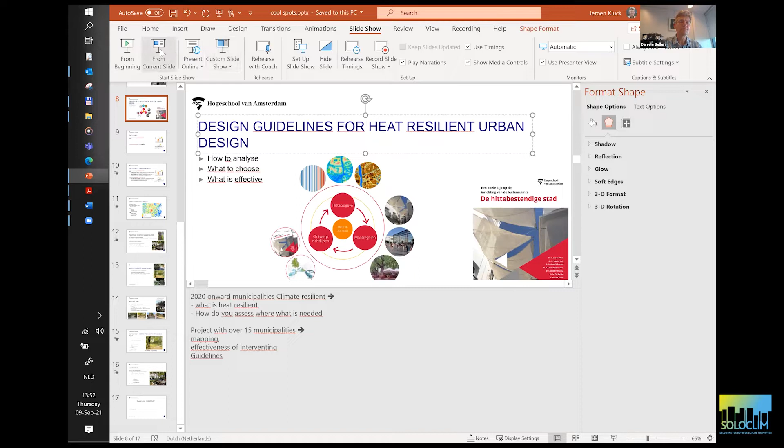Okay, thank you very much. I'd like to share my screen, but because I just came in, I'm still looking where I can find my presentation. It is on my screen, so I think maybe you see yourself now, but if I switch to the right thing, it should come. In the meantime, I can start talking. One moment, slideshow, start, from the beginning. Do you see my slideshow now as well? Yes. Okay, thank you very much.

So my name is Jeroen. I'm working at Amsterdam University of Applied Sciences. In fact, I'm a civil engineer and a water manager. Many years ago I was mainly interested in sewer systems, but then it became more interesting because extreme rainfall events did flood cities, so I started working on this as well. It was in 2006, and it struck me that many municipalities mainly designed only for the design storm, an amount of rainfall expected once in 2 years. We didn't look at all at what's happening once in 50 or 100 years. So that was the reason why I started working on this.

Many municipalities had to find out what they wanted to do about this. I was able to create a research group at the Amsterdam University of Applied Sciences, and now I have 15 people working for me, a whole variety, from meteorology to urban design and of course hydrology. The title I got is about water-based solutions to create climate-resilient cities. They also become healthier, resilient, dynamic, but certainly they should become more attractive, so I like to add attractive. I want to show you 3 projects I've been doing the last years, ranging from small scale to larger scale.

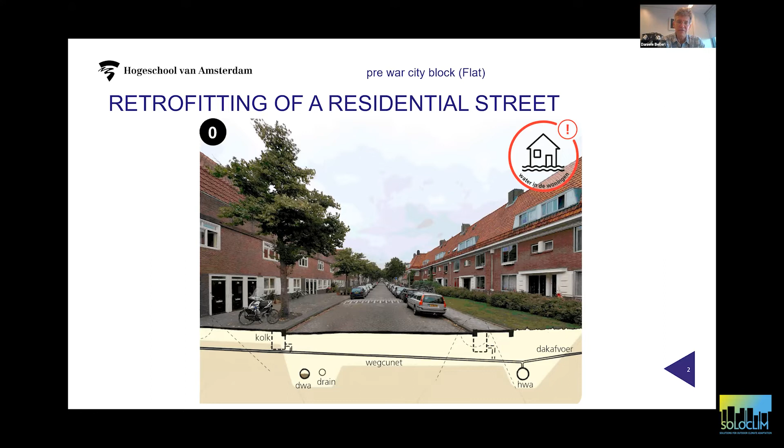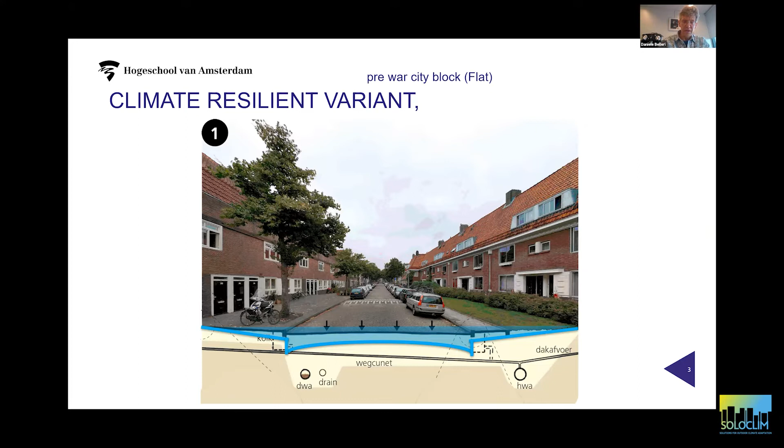The other example is a solution with a swale, so you make the water move towards the swale. This solution is quite easy. Because of those solutions, we said you can do climate-resilient design at the same cost as the normal design of urban fabric, and we showed in many situations where it was possible. What do I need to say? Oh yeah, one other thing I need to explain.

We also assume that of the amount of rainfall, only 20 millimeters can go into the sewer system or into the drainage system, and the other 40 millimeters at the extreme event will stay in the streets. But normally, this 20 millimeters in 1 hour is expected only once in 2 years. So you hardly ever see rain in this green area.

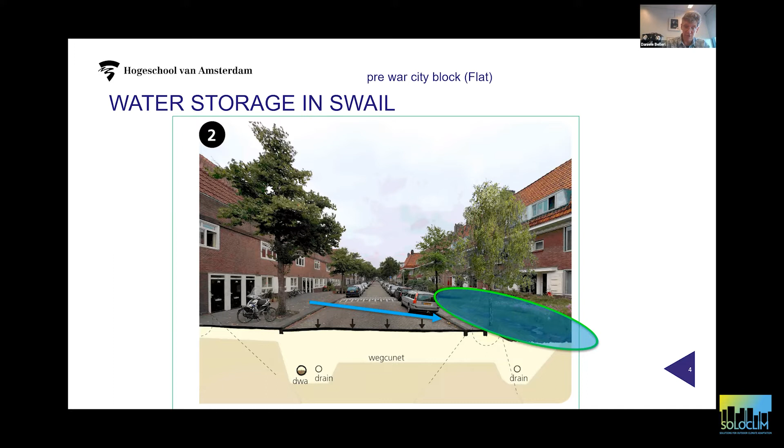So this is a very simple example, and we made quite some examples of this for all kinds of different characteristic urban typologies in the Netherlands. So we had like 10 different examples showing that in those examples you can retrofit your urban area at the same cost. And we call this The Climate is Right Up Your Street. This book, this one is in English, and you can get it at my website. So I hope it will help you. This was focusing on stormwater.

Next, because municipalities asked for this, we moved towards urban heat. And the first thing in urban heat was the Real Cool project. This was a project we did together with Sanda Lenzholzer also. She set it up, and it was interesting because municipalities and their designers in general think, okay, we add surface water in the city to cool down the city. And we wanted to know how to design the small surface water in the cities in the way that we have the maximum effect.

Part of the research was making those designs, making prototypes for designs and showing how you can optimize them. The other part was done by Sandra and her colleagues, another party, and was about ENVI-met modeling and really calculating the effect of those surface waters. And the disappointing result was that the simulations showed that the local thermal effect of small water bodies can be considered negligible in design practice. So there was hardly any effect of this nice water in the urban area on air temperature and on comfort temperature, like PET.

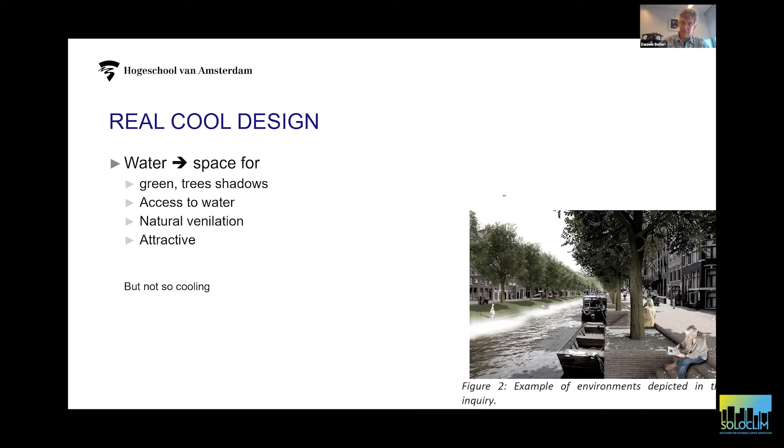So for the designers, don't make surface water expecting that it really cools the temperatures. However, it's not so bad as I'm saying now, because there is quite some reason to put water into cities. Water makes cities more attractive, right? And it gives the opportunity to create space for trees, and trees create shadow, and shadow is the most effective way of cooling a city during the day. Next to this, you can design it in such a way that you have access to water, and of course you can also create natural ventilation. There's a place where there are no houses, on the water itself, also no trees, so you have ventilation, and in the end you make the city more attractive. So this was the second example I wanted to show you.

And then the third example is more about heat resilience. It's not really a water solution, but many of the solutions I present now for heat resilience are about greening the city, about trees. And of course, you need water for trees. So that's why I think it's right to present it here. About heat in the city, the situation was that from 2020 onwards, all Dutch municipalities should retrofit their cities. When there's a project, you should retrofit it in a climate resilient way. It's about stormwater, drought, water safety, but also about heat problems. And municipalities didn't know at all how to assess urban heat, didn't know what to choose, and didn't have any guidelines for this.

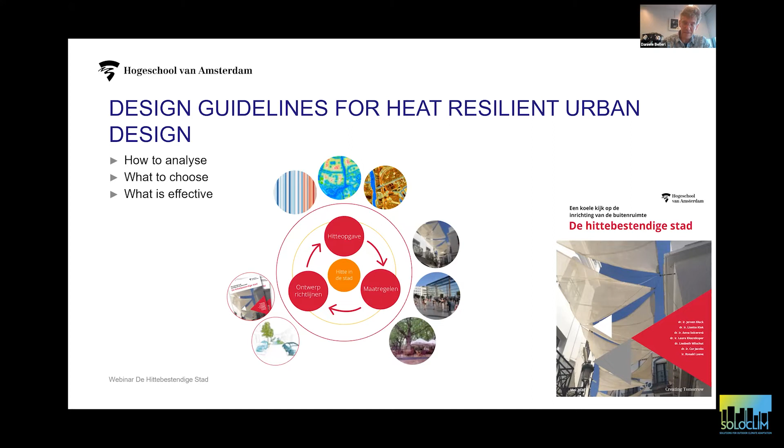So with about 15 municipalities, we started working on how to assess and analyze the urban heat, to find out what measures are most effective, and how to choose what you want in the design. And we came up with several guidelines. The results have been written down in a Dutch report. I'm sorry we didn't translate it yet. It's about the heat resilient city. So I still have to do this. But to explain it, we came to the conclusion that there are mainly two temperatures important. We want to have the local air temperature, the perceived temperature, so the comfort temperature, decreased during the day.

And we want to have this because then you can keep the city attractive and accessible during the day. And the other thing is we want to decrease the air temperature over the whole city. So we have two lines of approach, and we made 3 guidelines from those 2 goals. And the first one is distance to cool spaces.

We said you need a walking distance to a comfortable, cool space from any apartment in the city, and not more than 300 meters. So people being trapped in their own home because it's very hot and they maybe don't have an airco, they can still go outside and find a nice place outside to have comfort.

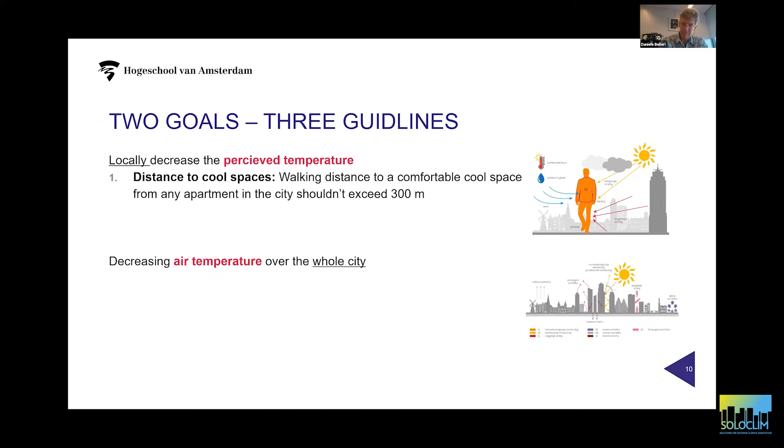And the second thing is sufficient shade on the walking areas. So during the hottest moment of the day, there should be enough shade on walking areas, like 30 or 40%. And we tested this number 30 or 40% on many photos we made from streets, and we asked the municipalities, what do you think is a correct number?

We did not check this based on the effect for people. It's because we think it's not possible really to decide what threshold of amount of shadow, or even what distance to walk should not be exceeded. So it's very difficult to make a threshold. So we chose thresholds which we have decided together with the municipalities. Okay, and this was the second one.

And the third one is the percentage of green spaces in the neighborhood. And we said, okay, we wanted to increase the amount of green space in an area. So we analyzed many municipalities, and we said, for a certain typology of an urban area, the average amount of green in this area is like this. So every municipality should have at least this average value for green in this type of

urban area, but maybe you better should increase it towards what's also possible, and that's the average plus a standard deviation. Also, this is not a very strict number. It's a strict number, but it's not really validated on at which level do you have less problems.

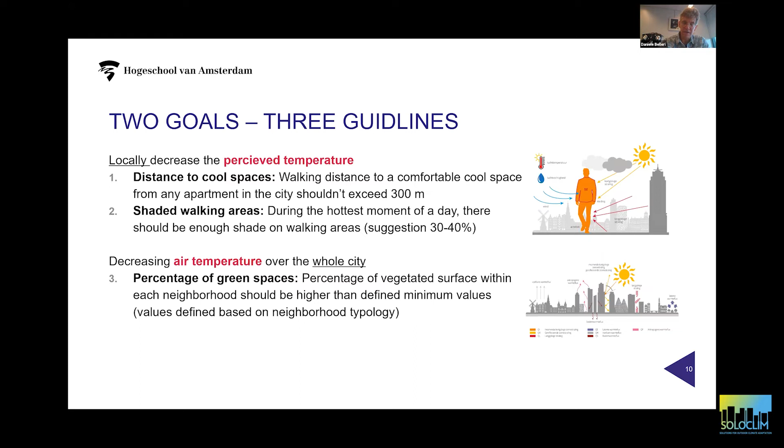We especially chose simple guidelines, which could be implemented by municipalities. And in the Netherlands, there are quite some municipalities who have adopted those guidelines and are using this to redesign their urban space. And we also took care that the way to analyze a design or an urban space on the guidelines is quite simple.

And in the Netherlands, we have a map available for the whole of the Netherlands on high local detail, showing the PET values of every location. And in fact, I believe it's more a shadow map, because in the shadow, the PET value is like 10 to 15 degrees lower than in the sun. So you see mainly where's shadow and where's no shadow.

But those shadows are possible local cool spots, that's what I mean. And those cool spots are what you need. And okay, you have a map to start working on. And I think after this map, you really need a designer or a planner of the municipality to find out if this cool spot is really an attractive cool spot.

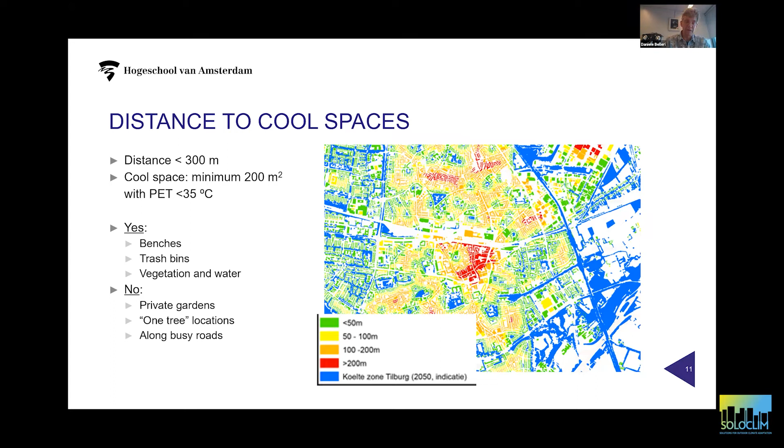And so we put some extra questions like, are there benches, trash bins, is there vegetation and water, and is it not a private garden, and other things. So we checked some things, but this was not sufficient yet. So we did more research with more municipalities to find out what really makes nice cool spots. So in several municipalities, I'll go a bit quicker here.

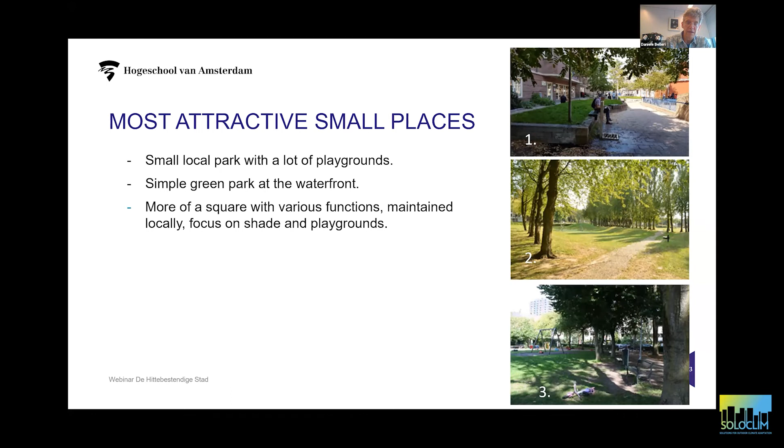So the most attractive small places were places with a local park and a playground, a simple green park at the waterfront is also very good, and also mixing of various functions, because those cool spots are not only meant for hot days, but also, of course, for the rest of the year. And we also had some examples not like this.

And based on this, we came with a list of, okay, how can you make a cool spot? We have some essential issues. So the shade should be large enough. There should be benches, enough vegetation, diversity between sun and shade, but also some bonus points. And we hope that with those guidelines, the municipalities can design their urban space in a heat resilient way.

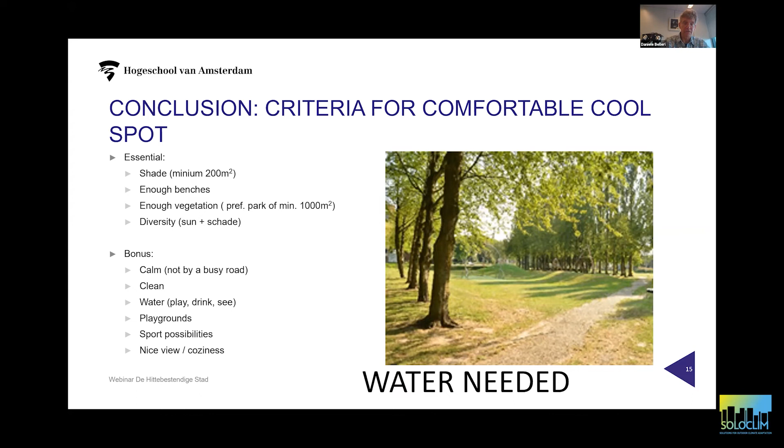And we think that the designers themselves have sufficient freedom to design it in a way which is really useful. And that the design guidelines are simple, so those rules can be implemented within all the other tasks a designer has, like the energy transition, change of mobility, maybe new design of the area and other things. So that's in my last sheet.

So the conclusion is, for stormwater, you can create space for storing water above ground. The cooling water, it was not really cooling on temperature, but it creates space and can make the city much more attractive. And for heat, we made some design guidelines.

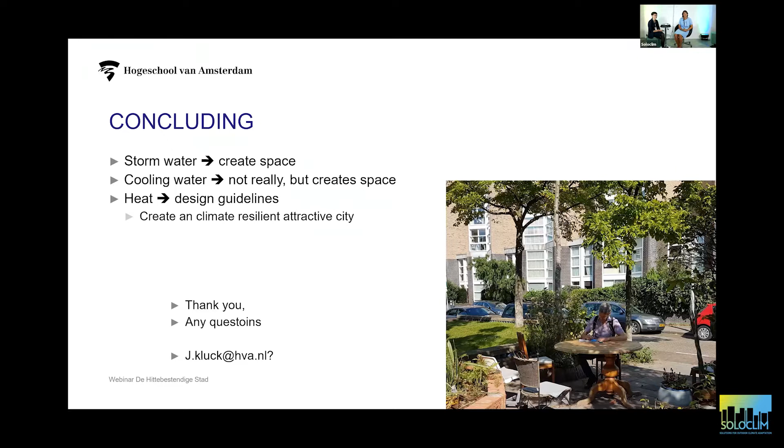It was a very interesting proposal, I hope not only for the cities in Holland, but for everywhere in the world. If you don't mind, I would give the floor to Mariana, who is sitting next to me now, and perhaps we collect the questions after her brief research.

So Mariana is also part of the Soloclim water-based solutions research group. And while Adrian was looking into, let's say, a bit more local solutions, Mariana is looking at the master plan scale. So please go ahead. Thank you. Thank you so much, Monica. Thank you for having me.

Good afternoon, everyone. So my research is titled The Evaporative City, Guidelines on Bioclimatic Urban Adaptation and Regeneration Using Water. And I'm ESR number 4.

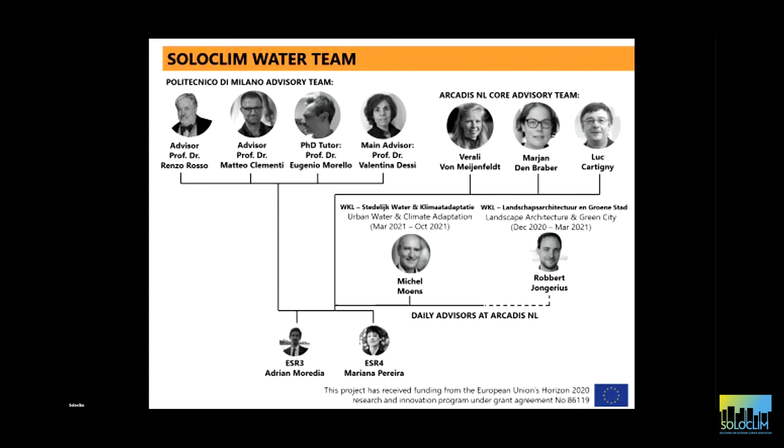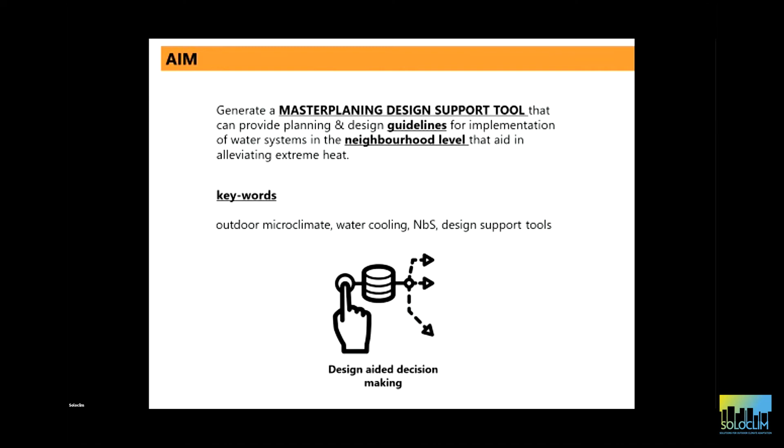So the aim of my research is to generate a master planning design support tool that can provide planning and design guidelines for the implementation of water systems at the neighborhood level that aid in alleviating extreme heat. So I hope to come up with what I would call a design-aided decision-making tool.

So my main research questions are: what water cooling toolkits of systems can benefit cities in adapting to extreme heat, and of course also excess precipitation? Which water cooling solutions most benefit neighborhoods in different climates to respond to the urban heat island effect and extreme heat, and of course, excess precipitation?

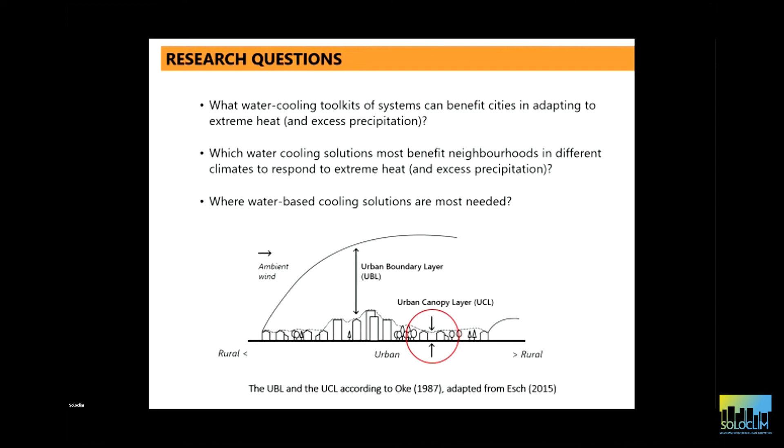And where are water-based cooling solutions most needed based on socioeconomic factors, cooling needs, and the need for creating a good quality public space? And our focus is the urban canopy layer, so the space below roofs.

My research is structured in 4 parts. So first I started with analysis at the block scale, looking at microclimate simulations of baselines using the ENVI-met software. Then I moved to the city scale to map, let's say, hot and cool spots in cities. And the third part focuses on neighborhoods, using research by design and the results from parts 1 and 2. Then I aim to produce my guidelines for the water toolkits.

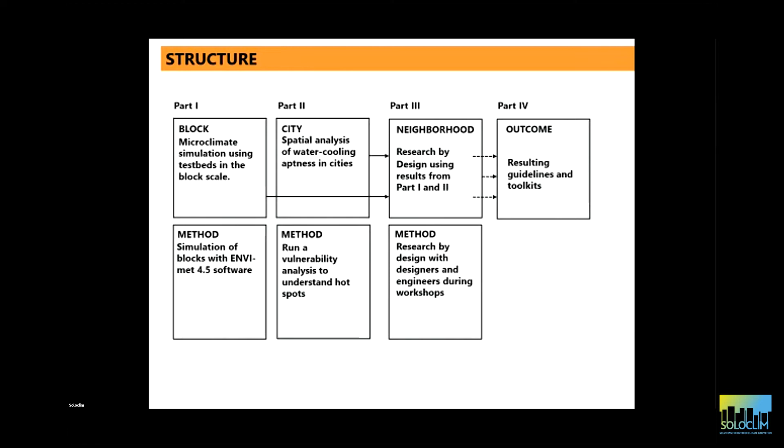So revisiting water cooling principles, this is well known. We are not creating anything new in terms of principles. So first of all, we have high thermal mass of water and evaporative cooling. From the literature, we know big water bodies like big lakes and the sea are effective for cooling because of the high thermal mass of water. But for small water bodies, the effect is negligible, or they even have a warming effect.

And with evaporative cooling, we know we can decrease air temperature by up to 10 degrees Celsius. And this is not new. We know this from Persian and Egyptian vernacular architecture. For example, here we see the badgir, the wind catcher, using a salsabil fountain.

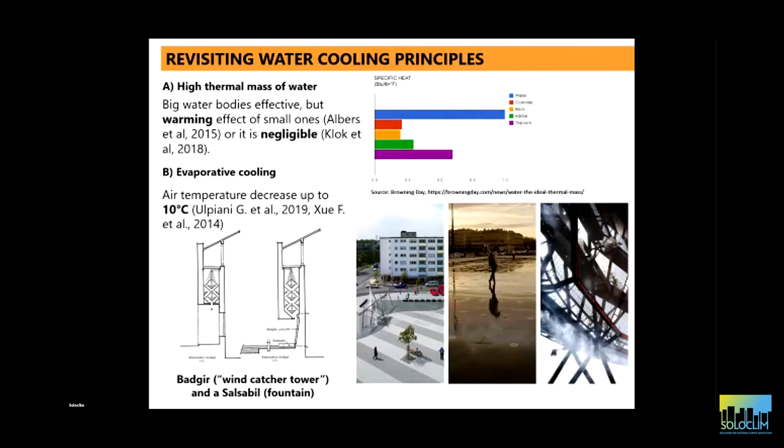But when we talk about water cooling for outdoor spaces, we need compatible climate conditions. We cannot use it the whole year; it needs specific conditions. So mostly in summer, and we need a high level of solar radiation, high air temperature, and low relative humidity. Here we see a map showing where evaporative cooling is most applicable in Europe, especially in zone 1, where we have hot and dry summers.

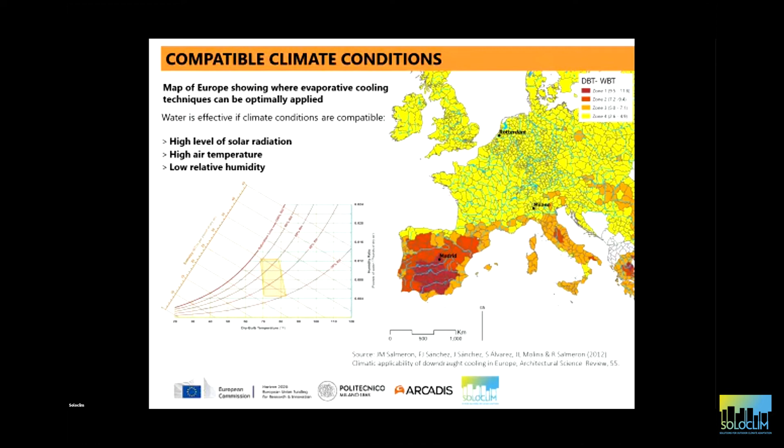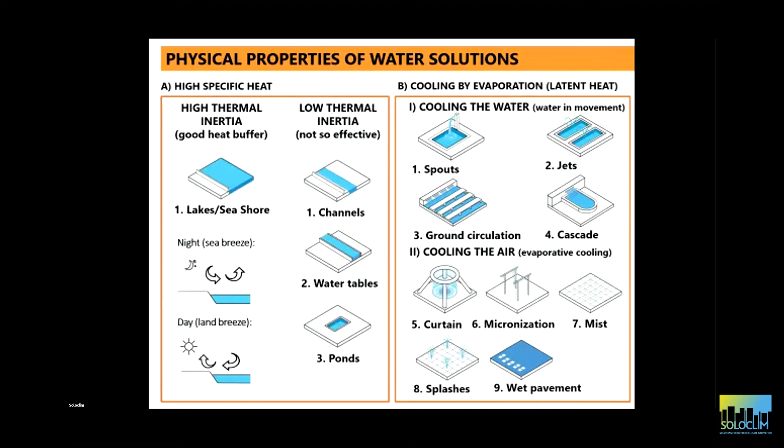And in revising the physical properties of these water solutions, from the high specific heat of water and then cooling by evaporation: from the high specific heat of water, we know what is happening. We're not focusing on that, but looking at the second part, B, cooling by evaporation through the latent heat of water, we have cooling the water, for which we have the fountains, and cooling the air using micronization, mist, splashes and wet pavements.

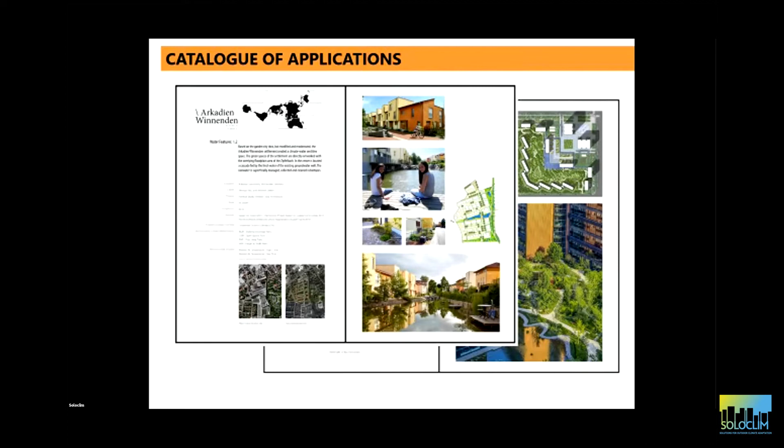Also, in my research, from these water elements, we started to compile a catalog of applications of these solutions from projects in Europe. Sometimes it's one of these water solutions, sometimes a combination of them, in open spaces, squares or neighborhoods. And I have 3 case study cities because, as I said, it's not applicable everywhere.

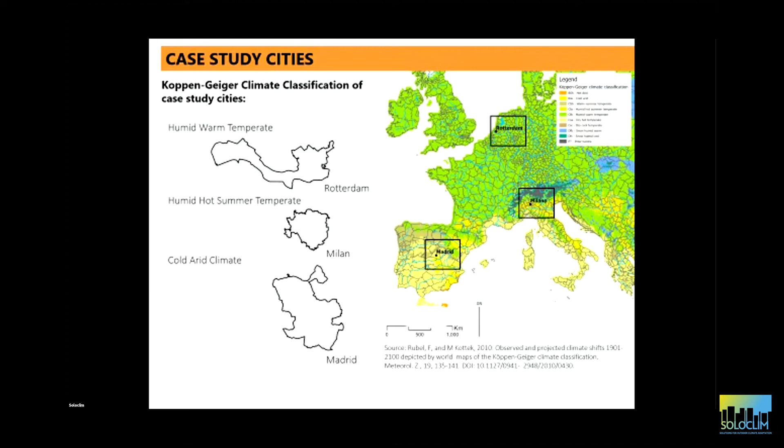It's dependent. So we're looking at cities in different climates to see how these solutions respond when they are needed. So Rotterdam, Milan, and Madrid. So we're looking at the humid warm temperate, the humid hot summer temperate, and the cold arid climate.

The issue we are trying to address here is heat and health. And our focus is in Europe. And we know in Europe, heat waves are the big killer. It's the natural disaster that kills the most people. And the increase in frequency and onset of heat waves, coupled with what we call the urban heat island effect in cities, demands early adaptation measures.

And when we talk about heat and health, we need to focus on 2 factors. First of all, physiological factors, and the second one, socioeconomic factors. When we talk about the physiological ones, the most vulnerable groups are the elderly and children because of their physiology. And in the socioeconomic factors, we need to care about low-income groups and athletes, outdoor workers, and people with chronic health conditions.

So the opportunity we see here is to address the urban heat island, heat waves and extreme heat, but also heavier storms and extreme precipitation. And now, with what we saw with the COVID crisis, inclusion and belonging in recovery plans are at the table right now at several municipalities worldwide, but especially in Europe. The crisis led to a decreased livability index. And here in Europe, we see an opportunity to build back better and greener.

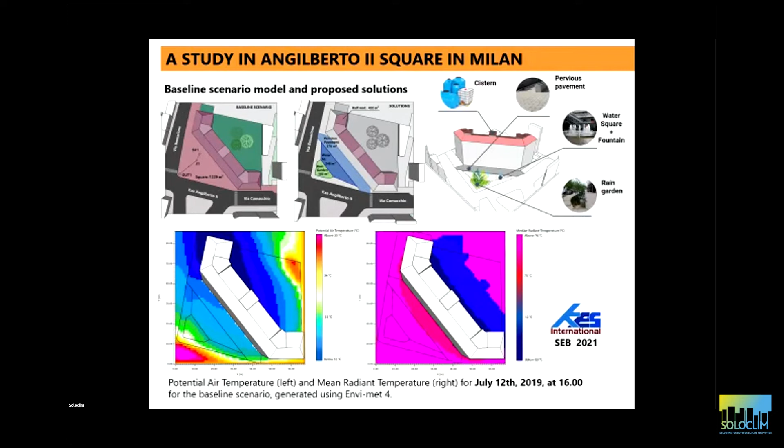And when we talk about climate risks in Europe, of course there's heat, but also, especially in urban areas, heavy precipitation. So I started to assess opportunities in cities. Here's a case study in Milan that we wrote for a conference. I studied stormwater collection in a square that just had an intervention with tactical urbanism. And we tried to apply the solutions and see how they respond to both precipitation and extreme heat. We know it is very effective for a hot summer day, but in addressing heat waves, we still have some challenges.

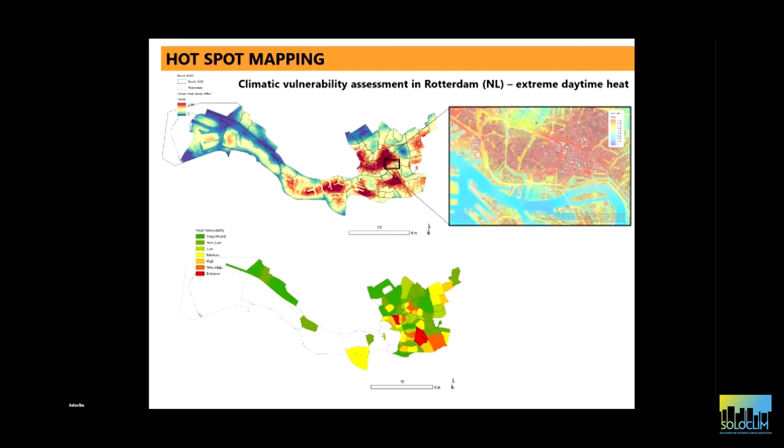Next, I was also working on hotspot mapping at the city scale. This is a study in Rotterdam, assessing hotspots related to urban morphology. And I came up with a heat vulnerability mapping, showing the most vulnerable neighborhoods in the city. So my methodology, parts 1 and 2, are completed at this stage. And I'm moving now to the neighborhood scale.

So now trying to simulate neighborhoods using some of the morphological parameters that came from the city, trying to assess urban materials and also using climatic data to come up with results in air temperature decrease and PET, physiological equivalent temperature, that we hope will give results in terms of urban heat island reduction and thermal comfort improvements.

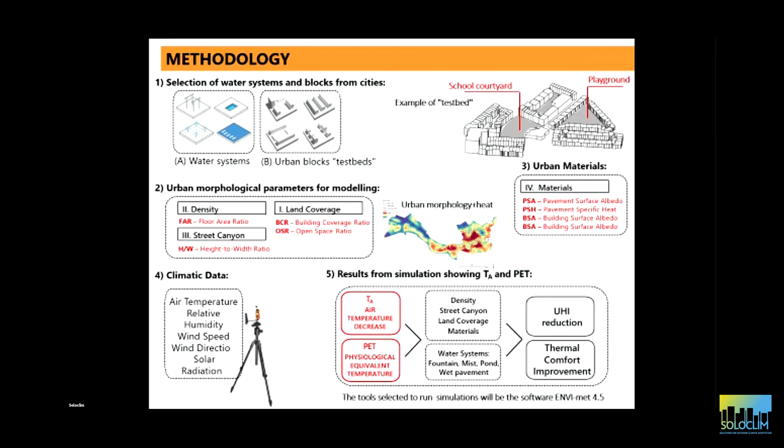So our final considerations are that evaporative cooling is effective. We need to be careful with humidity, for example, Legionella. And this technology is not new, but it can enhance the multifunctionality of the public space if combined with other systems in a network, for example, vegetation and responsive systems.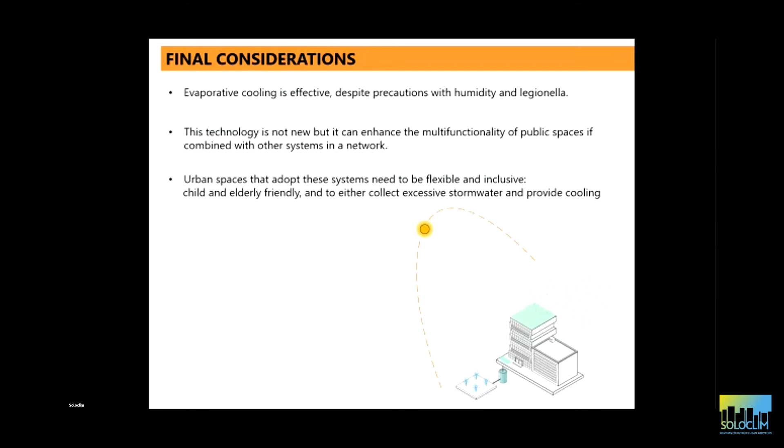And urban spaces that adopt these systems need to be flexible and inclusive, as we saw. So they need to be accessible to children and the elderly, and they have to function as ways we can collect and store excessive rainwater and provide cooling. Thank you, and I welcome your questions.

Thank you very much, both of you. My colleague actually told me that there are 2 questions from the audience, so please. Yes, the microphone is still moving. Maybe I'll ask you a question first.

You've been working in different cities, mainly in Europe. I was wondering if you saw any cultural differences in people's response, because of course cities are not planned based on the same rules, but they're planned also a little bit on the cultural heritage and our being accustomed to the water.

Yeah, of course. I'm curious to know, because in cities people have a different relation with water. For example, the relation people have with water in the Netherlands is different from Italy. In Italy, we see the strong culture of fountains, and how we can work with that. In the Netherlands, not so much the culture, but that is changing because we have climate change and extreme heat is coming. So people are now more aware of the effects of extreme heat. This is something we are interested in seeing in the 3rd phase of the project, using research by design and workshops and charrettes with practitioners.

Great. And that's, of course, taking into account that we are all enjoying the water, and it's summer and not winter, and it's raining all day. Vincent, let me know if you have questions from the audience, or otherwise we can also switch to Jeroen and ask if he has a question for us.